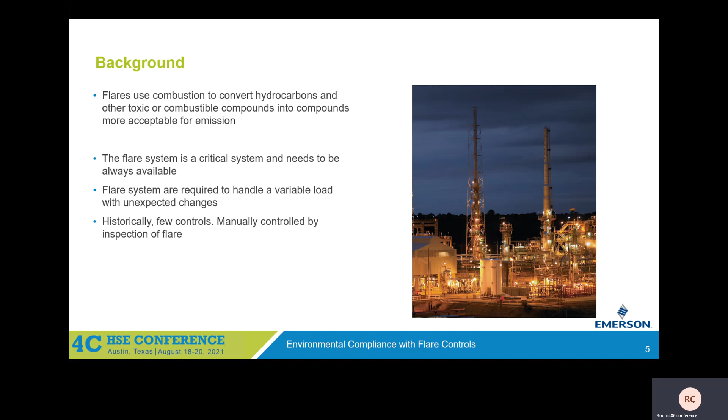Historically, it's had few controls, right? We've sort of set it up and put it out there and made sure it's going, and the operator might take a look at it, put some steam in it and do different things there. But largely it's been viewed as a device that performs its function, and it was largely manually controlled by simple inspection.

And problems around it, right? Obviously it's built as a safety device to handle that material that's coming towards it. But incomplete combustion is the number one thing that you would see, where you might have stuff coming at the flare and it might not be hot enough, or there might be too much material coming through at a given time, and it can actually lead to incomplete combustion. We can have heavy materials move towards it that would cause a smoky flare, and then we need to bring in dilution and other things to remedy that.

Impacts, obviously there's the regulatory side of it, right? This is something that's monitored from an EPA standpoint if we're talking about the United States. And so we have to answer questions and make sure that we stay in compliance from a regulatory issue.

And then probably more importantly is community issues around the facility. We are seeing that this is of increasing importance, that we maintain a good relationship with the community around us. And obviously when the flare goes off, you get the calls and everything occurs there. And so we just want to make sure that we're doing the right thing. We're out with the community around us, and we release stuff that's fully combusted and ready for release.

So something new has come out, not very new now. It's 2019, but obviously with the pandemic and everything, we haven't had a chance to get together and discuss it as much as we'd like. But there's the CFR 63.670, and it is the requirement. And you can see right in the title, for flare control devices.

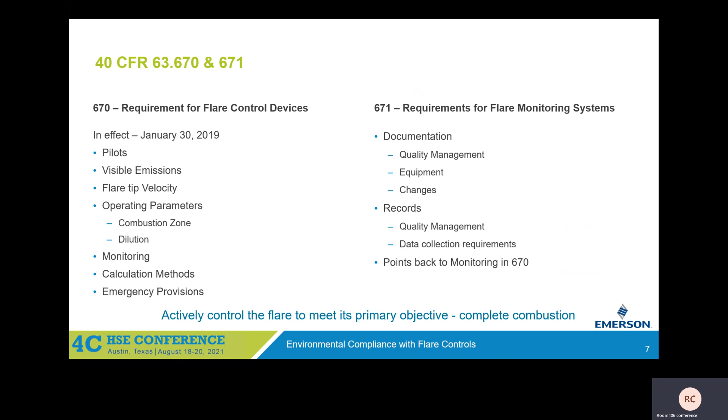That is really the objective of the legislation when you go through the whole thing: making sure that the flare achieves an objective and actively controlling it. Whereas before it was generally viewed as a passive device, now it's really viewed as an actively controlled device. So for me as a controls engineer, I didn't have very many exciting controls on the flare many years ago. But today the world has changed. It's different in the United States now when it comes to flare controls.

So we got to think about the problem. There's a couple issues when we move to an actively controlled device. One is it's got to respond to immediate demand, and it's got to be always available. So we got to make sure that whatever controls we put there are able to handle that immediate demand and that change in demand. The biggest challenge for me as a controls engineer: if you want to control something, you got to be able to measure it. And so that's a key thing.

You have a lot of unknowns. Composition of the material: what's relieving? Is it the heavy stuff? Where's this coming from? Is it lighter material? Is it hydrogen? What are the compounds that are coming at me? So that composition, depending on your facility, can be very variable. With a larger facility, you're going to see more variation, and typically smaller facilities see a little bit less, although I have seen quite a few that can dump a lot of hydrogen into the flare, which causes a lot of issues, but that's another thing.

And then the amount of material. During certain operations, you might get a lot of material, and in others less. So the controls have to be able to respond in a way that meets that.

And we'll discuss a little bit later on, but it can also vary, you know, it's literally second to second on it. You have multiple objectives that need to be met in the regulation. You're trying to drive that net heating value. Everybody's pretty aware out of this regulation that we're trying to meet a minimum net heating value. That is one of the key elements of it, is get above that minimum net heating value. There's also a velocity at that flare tip that you're trying to control. There's pilot presence and there's dilution, right? So there's multiple objectives that need to be met.

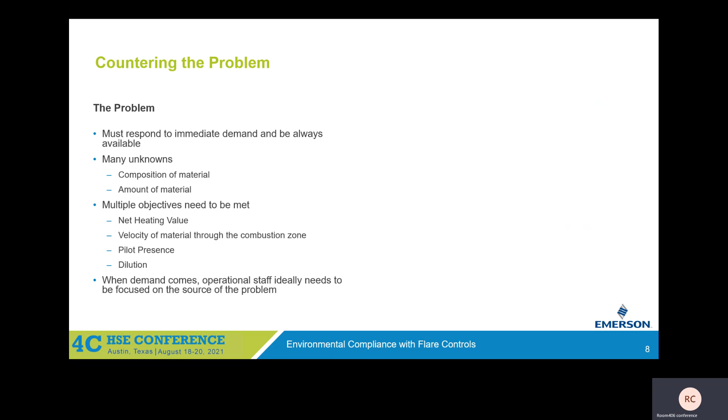And so the solution, I was thinking through this, some of the challenges that we come up with is what does that solution need to look like? Well, one, it needs to be always available, right? We've already discussed and we all know that flare needs to be there and it needs to be on demand. The solution has to be robust. It's got to be something that can handle a lot of the data demands that are thrown at it.

Because there are times, just to be frank, with a lot of the measurements that we're trying to bring in at the flare, that they're not super reliable under certain conditions, depending on what's thrown at it. So we need a solution that can determine that and say, you know what, I'm going to disregard that reading. I'm going to use a computed value instead of that reading. So it really needs to be robust in that way.

They have to be intelligent. It needs to determine, hey, we're in flare or we're not in flare. It needs to be able to respond to different modes of operation. We need steam in the flare, we don't need steam in the flare, and it needs to do that. It needs to be able to run against all these objectives concurrently. It just can't focus on one thing and then another thing. It really needs to look at all the objectives and go after all of them. And then finally, because that operator is busy, it really needs to be autonomous. It needs to take care of itself and really work reliably.

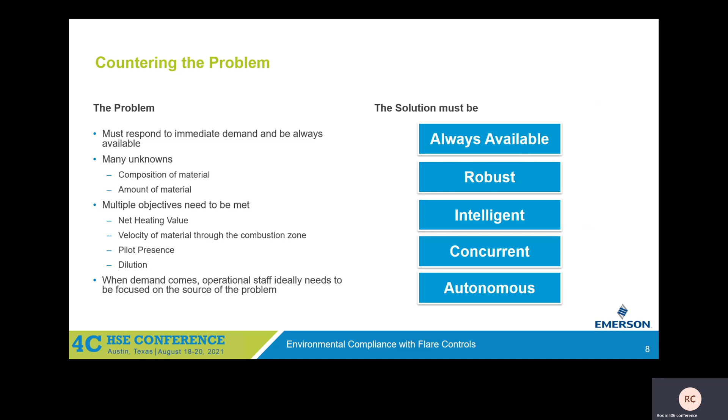So if you looked at that list and you go, hey, I got this, you're pretty confident, because that's a pretty high list of demands, right? Intelligent, concurrent, autonomous, robust, and always available. Those are some big demands. So when you look at always available and robust, it really needs to be deterministic. We need an execution environment that those controls are running in that is very deterministic, that is able to compute and arrive at a goal in a deterministic manner.

One of the things that we've learned over the years is it needs to be redundant. If there's a failure, we need to have something else that picks up and runs, and we have the capability to go repair that without it failing. If it's a simplex solution and it fails, guess what? Nobody knows until they're looking out there going, hey, the flare's not doing what it should be doing, and we have some major issues. And unfortunately, that'll be during a time when we're in an issue where it's escalated anyway. And it needs to be a system that's monitored.

So we don't want something that is put off in the corner and nobody looks at till it's broken, right? Because then what's going to happen? We're only going to look at it when it's broken, right? So that's the challenge of those systems. We need something that's monitored, that's out there.

And so what I'm proposing is that one of the best places to put that is into your control system. That is an ideal solution for that. And I'm showing you a couple of the solutions that Emerson has around this. The first one is the DeltaV PK controller. So we have a standalone controller, right? It's a reliable control environment. It's used to doing control.

It's fully redundant, so if one of the processors or one of the IO has a problem or fails, it can shed to the next. And it's got a health status, it gives you a health score. You can look on your Guardian dashboard and say, hey, my PK controller's looking good, or monthly you can see it's degrading, there are errors occurring, and it might not perform next time it's needed, or it's got a great health score and everything is working well.

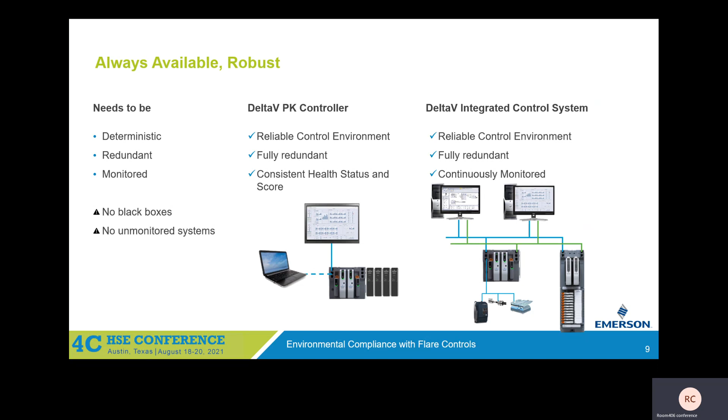So those are the things that we can see from the execution platform. It needs to be intelligent and concurrent. It needs to be able to detect the flare event that is occurring, see that material come into the flare and make sure we're making the correct adjustments. It's got to resolve multiple constraints. We talked about the flare tip velocity and the net heating value, and there are a lot of inputs, which we'll talk through on the next slide.

There are a lot of different solutions to the problem. We can adjust different handles and actually arrive at a valid solution, believe it or not. So we don't want to approach it as a single variable problem. You want to approach it as a multivariate problem and make sure you end up with the optimal solution. Otherwise, we'll just be emitting additional greenhouse gases and other things that are not ideal. It needs to be able to handle computations.

And then we might need to validate inputs versus one another. You can see over here we have the volumetric flow rates of those gases coming through. Well, what if it's bouncing in and out and we have a bad reading? What happens to that calculation? Is it going to perform in a desired behavior? So we need to be able to validate those. What we built into the system is being able to understand that this is bouncing around, and hold it at a given rate. And so that's an important piece.

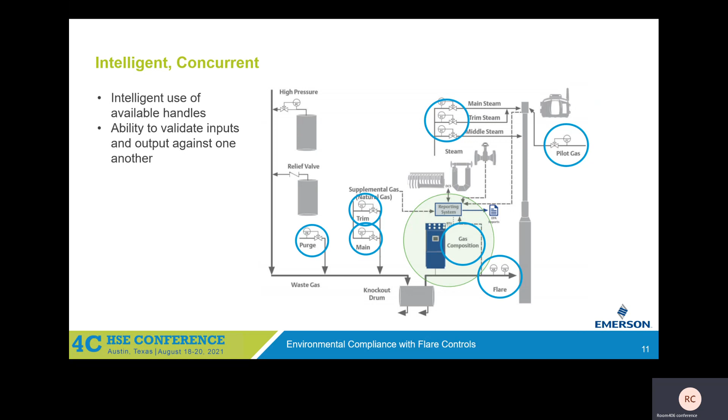And then you have some inputs that are coming here, around the flare gas and pilot gas. So you've got to be able to read, detect, and understand what is occurring there. And you've got to understand when these might begin to tell you a false reading, and when you might want to bias it with a computed value instead. Those are some of the things that we do. That's how we handle the balancing. That is also how we handle some of the regimes where we get into certain compositions where our volumetric flow rates might be off. And so we correct for those. So you see a lot of adjusted values in the solution.

So there's a lot of complexity, and this is an example of an implementation that somebody's done, right? You can see here we've got some ladder-looking logic, some flow logic. And sometimes people try to use sequential logic to do this. They see complexity, they say, hey, I need to make a lot of decisions, let me use a sequential function chart to solve this. And there's some good things about that. Sequential function charts are really good at highly ordered operations. If I was making a peanut butter and jelly sandwich, a sequential function chart would be a great thing, because I could go one step after the next.

Many specifications are written that way, right? Because when I write stuff, it's linear. I write from the top to the bottom of the page. I present my ideas in a linear manner. And so a lot of people read the spec, and immediately they go to, hey, I want to use a sequential function chart for this.

But one of the challenges is there's some cons to sequential function charts. It's executing one action at a time, one after another. They're highly ordered. They can become stuck, right? I've got to look at the logic.

Got to be real careful. Okay, in this condition, when I'm executing this step, what are my abnormal situation handlers? How do I move out of this step, et cetera? And so it is really built for that type of logic. Those sequential function charts, when we made them for the control system, they were in response to S88, a batch protocol that was put forward.

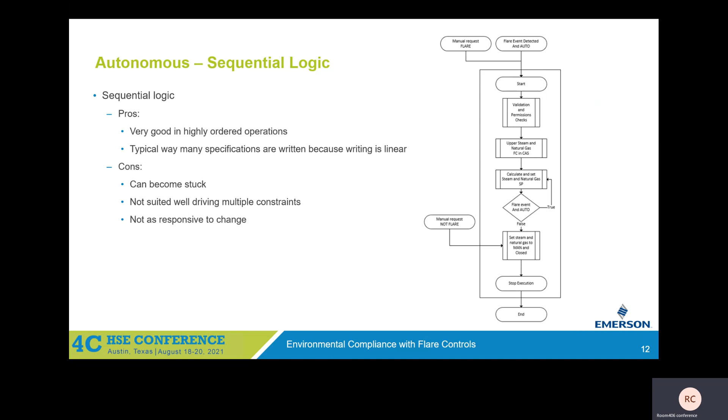So what would we do otherwise, right? If we don't do sequential function chart, what else is out there? Well, I'm going to introduce a concept called state-based control. There's a whole ISA standard around this, ISA 106. It's a new development, but it's actually been in industry for a very long time. It was actually invented many years ago, before the computer even existed.

But the states are defined from process knowledge. So we have a number of defined states. For our example, with flare controls, we might have the flare being offline. We might have it in low flare mode. We might have it in a high flare mode. We might put it in manual mode, right? So it can definitely recognize those different states.

You can think of a simple thing like a lock on a door, right? That door can be locked or unlocked. Those would be the two states of that lock. Exact same way with the state engine: it has a very simple logic to say, hey, what mode of operation are we in? The process is always in one state, right? The flare can't be in low flare or high flare at the same time. They're discrete states.

Each state has its own configured actions, right? So it would know exactly what to do and how it would configure those controls, interlocks, et cetera, in each mode of operation. And then you have smooth controlled movement between the states. So if it needs to go from low flare to high flare, it's able to transition very effectively, and even into offline mode.

And these transitions between the states can be automatic, manual only, or both, right? For instance, going offline would be something that potentially an operator would have to do. You'd say, hey, I'm going to take this from low flare, shut it off, bring it into offline mode, or bring it back into low flare mode.

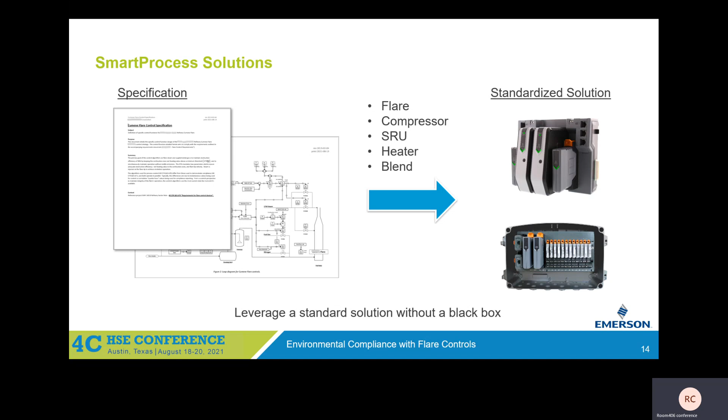We have smart process compressor, which is a little bit larger application for turbines and compressors. We have SRU applications for sulfur recovery units, which was actually one of the first ones that we did. Heater as well as blending applications. So you might have some of those others that might be relevant to what you're trying to do.

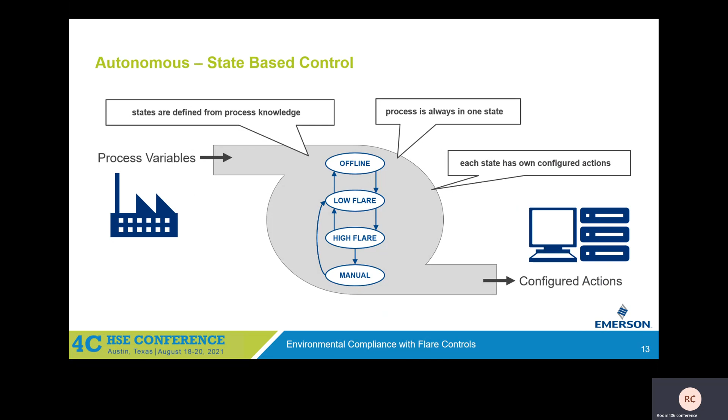And then when it gets to the readings, the measurements to implement this, it can be a challenge. And to be truthful, what we think is happening is that the controls automation department is eventually going, man, we can't get this measurement tied in. It's really struggling, it's not accurate. I've spent hours upon hours on this, and I can't spend any more. So we're just going to type this in and say it's working. It's a tough deal, but that was one of the reasons why we said, hey, this can be done in a lot better way.

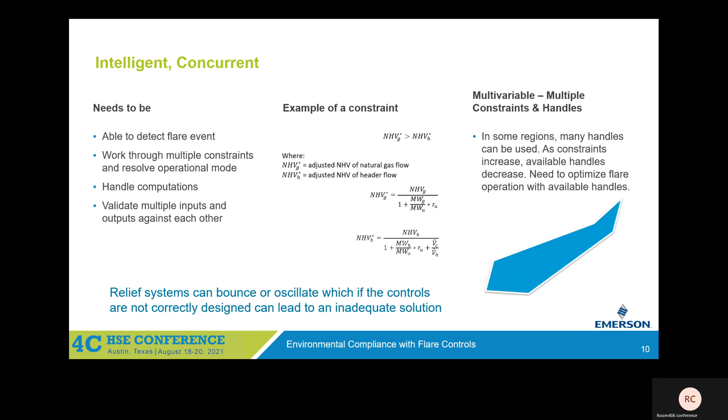And it's a big struggle, because if you go piece by piece, single variable, it's really difficult to get to the solution. But if you look at it as a holistic solution and say, okay, this is really what it takes to get it to work, you can tune that in. There's a number of tuning parameters, by the way, behind this to really tune it in for the flare. Then that's really what makes it go. So, good question.